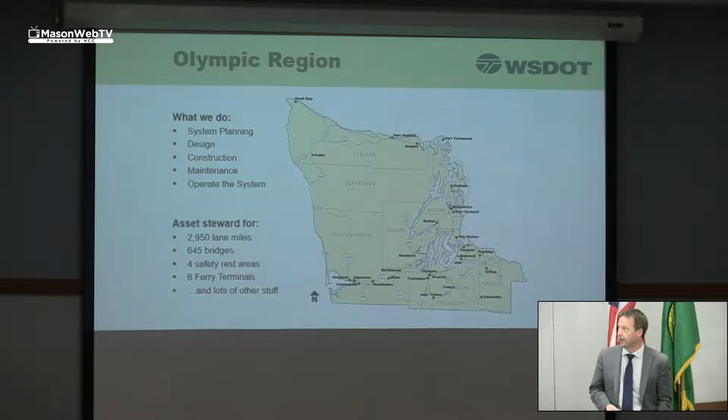I wanted to start off with just orienting y'all to Olympic Region. The state of Washington is divided up into 6 geographical areas for WSDOT, and Olympic Region is one of those. We are, as you can see there, a 7-county area. And the 6 regions around the state, our mission is to deliver products and services for our customers, which includes all of you. And as you can see, we do that by planning, designing, operating, maintaining the system.

And the system is a lot of stuff. I just put a few bullets up there. We own a lot of stuff, a lot of lane miles, a lot of bridges. And our job is to run that effectively, and we don't do that ourselves. We do that with the help of industry, with the help of all of our partners, the 48 cities in the Olympic region, the 171 unincorporated areas, the 13 tribes, and a whole host of inquiring minds that are interested in transportation. Just about everything runs on the transportation system.

So before I go into construction this year, I wanted to talk a little bit about winter operations. This was a particularly tough year for us at WSDOT. I'll use a technical term, we got slammed. We have 49 state routes here in Olympic Region, and at various times, starting in mid-November until early March, we had over 140 water over the roadway incidents on 28 of those highways. We had 111 tree down incidents. Similar to this one on 101, which, if you all recall, 101 was closed north of here for over a week, I believe.

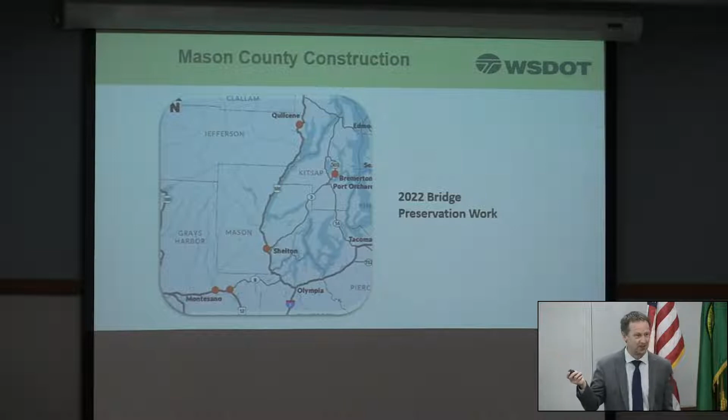This work, we've let the contract, and the contractor doing all these sites told us they might like to come to Shelton in mid-June, so it's coming pretty fast. So anyway, stay tuned for more.

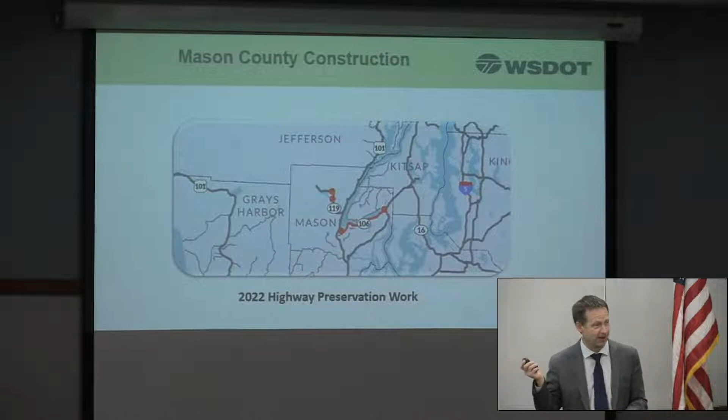Turning to highway preservation, we have 2 projects. It's actually 1 project, but it's 2 different locations. We'll be chip sealing, BST work on 106, the entire length of 106 from 101 out to Belfair, and then a 4-mile section up on Lake Cushman Road on 119. Recognize these are popular recreational routes, and chip seals are not our favorite either. We end up not just paying for the work, we pay for windshields later. I encourage you to just slow down, patience.

And why do we do chip seals? Ideally, we like to pave, but on our routes with lower traffic, and frankly with lower truck traffic, since trucks are what damage roadways, BSTs are an economical solution. We can't afford to pave and overlay highways everywhere anymore. So we use chip seals really to keep the water out. Water is what damages highways, plus the hit from the heavy vehicles. We get about 7 to 8 years out of a chip seal. We get about 12 to 15 plus, depending on traffic, out of an overlay. So we can get 2 chip seals, and it's about 4 times less in terms of money for a chip seal.

It's probably alternating one-way traffic, so they'll push traffic on one side of the road while they work on this pier and then swap traffic over. So this is going to be a little bit of a hit as you're going out of town. Not a DOT project, so don't call me if you want to complain.

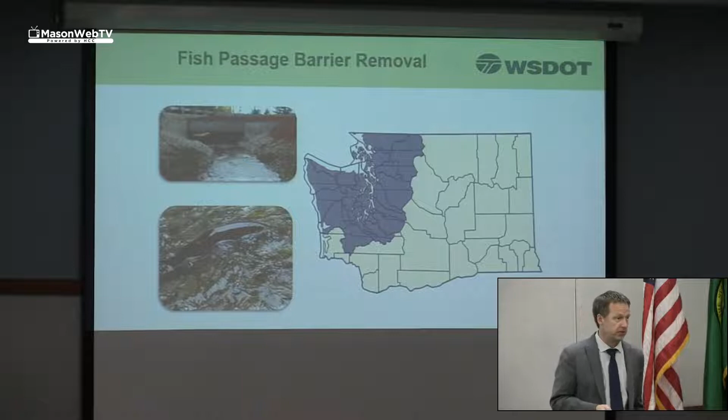We have a lot of those here in Mason County, the whole region. We have roughly half of the fish barriers in the state right here in the Olympic region. So this is not this year, this will be next year. We have let this contract. It is a design build contract, and every one of those dots is a fish barrier. So it's primarily on Highway 108, and there's one, Griggs, down on 101. It's going to be high impact. This is design build, so I can't tell you exactly what it's going to look like, but typically we do what we call a shoofly.

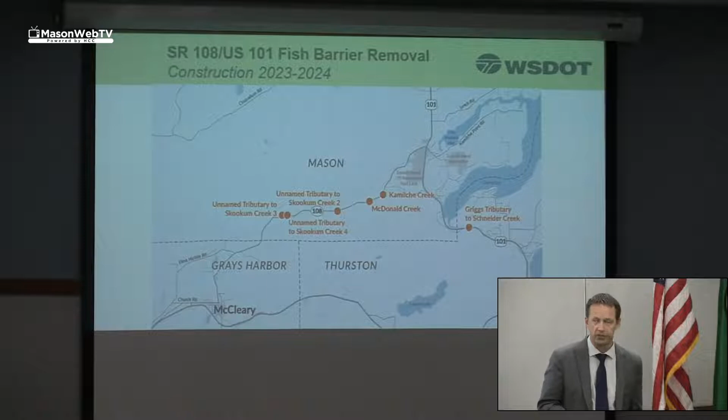We'll maintain the lanes, and we'll take traffic off the side while we replace the culvert with a bridge. We are talking about some high impact, short duration closures on 108. So we may detour traffic around 108 to get in and get out as fast as we can. So more to come on that.

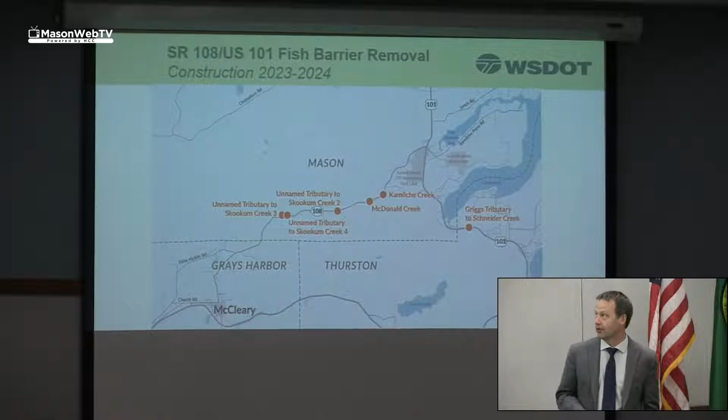And our commitment is you understand what we're doing, why we're doing it, what it's going to look like while we're doing it. So we'll have good communication and community outreach as we move this forward. Again, this will go summer of '23.

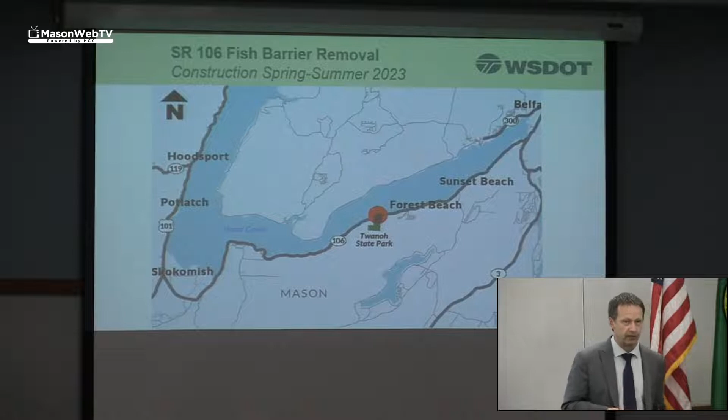And then Twanoh State Park. There is a fish barrier right at the park that we've been working really hard with the park on and others. Would have been nice to do it when we do the chip seal this year, but it's not working out that way. So next year, we will impact everybody twice. We are also looking at a closure here, a 20-day closure of Highway 106 with a detour. So that is what's being explored right now as the traffic control strategy. Anyway, this will go also summer of '23.

However, that $12 million we got from the legislature this year, we thought the intent of that money was for cost escalation. Cost of construction materials are going up just like everything else. But we've also heard anecdotally that a connection at Romance Hill and a connection at Log Yard Road is the intent for that money. And if that's the case, we will not be going to construction in 2024. It will be probably 2026 because we will have to go back and renew our environmental document. Our NEPA document for this project did not assume any connections, so we'll have to go back out and redo all of that. So we're working through that. I don't have an answer for you today, but construction's coming relatively soon. I can leave you with that.

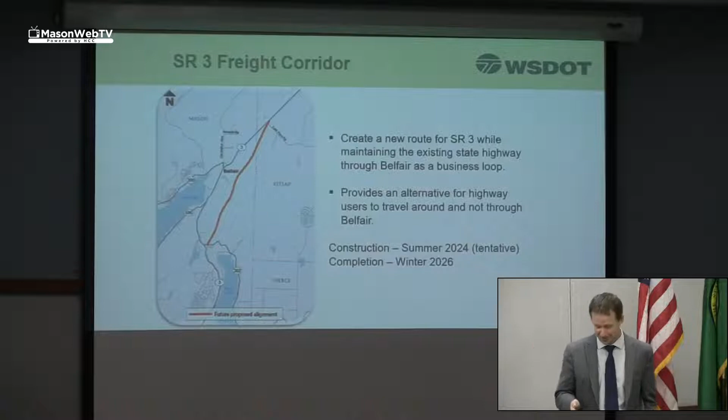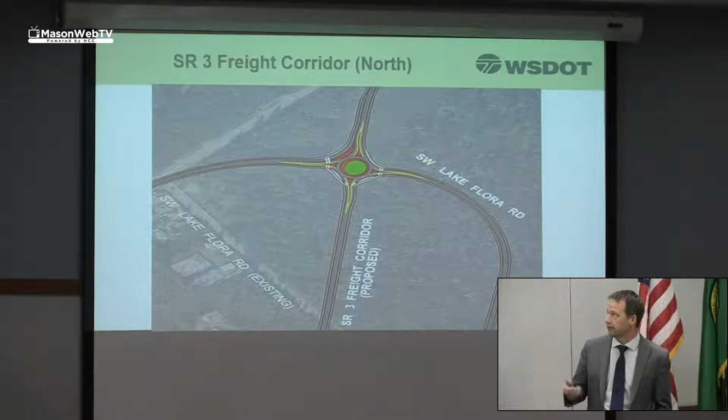And then at the north end, this is the Lake Flora Road connection. It's not going to be a T intersection anymore. We're bringing everything over to, I guess that would be the south, and this would be your way into Belfair today, and then this is the way to take the bypass. So roundabout constructions on both ends of the corridor.

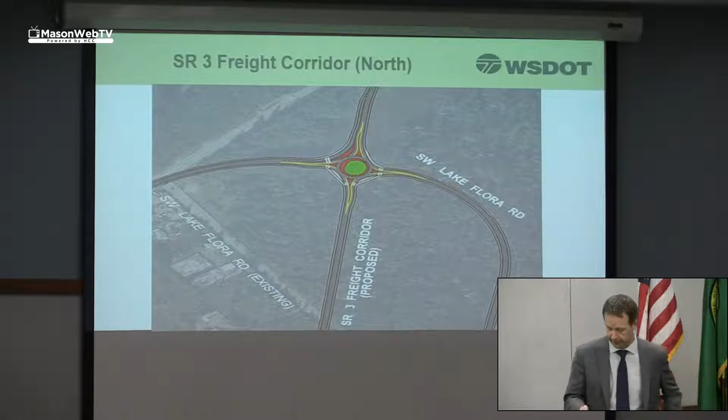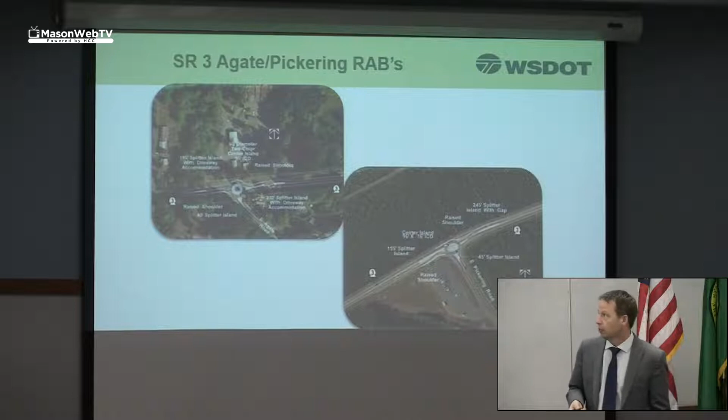And then I thought I would mention just out of town here, Agate and Pickering. You may have seen our online open house pre-design work on these. We're proposing roundabouts at both intersections for safety reasons. Roundabouts are incredibly good ways to reduce the severity of accidents, as opposed to a signal. So these will likely get built in 2024.

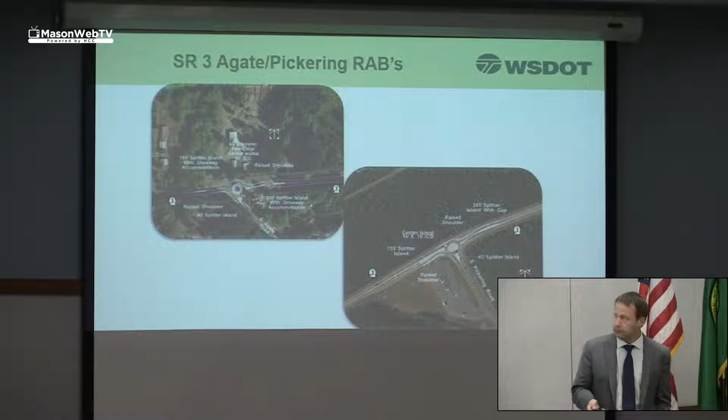And that's what I have here. That is the sum total of all the fun WSDOT projects in Mason County. I'd be happy to answer any questions.

Yes. Me? Yes. Okay. So is the Belfair project going to go on in the next year or so, or not? I was a little confused. The freight corridor? The bypass, they call it around here. Yeah, what's called the bypass. That's what I'm used to calling it too. We're designing it. We plan to go to construction in 2024.

Oh. We will not go to construction in 2024 if we have to add connections. Right now it's a limited access facility. There aren't connections, except at either end. If we have to add a connection at Romance Hill or Log Yard Road, we have to go back and reevaluate our environmental document, which will take 18 months. Okay, thank you.

Any other questions?

Okay, I'll leave you with one more that I forgot to mention. In the Move Ahead Washington package, the new transportation package, there's also 35 million for phase 2 of the Belfair widening. So we widened, sidewalks, two-way left turn lane in the middle. I think that stops just south of the school right now.

We have $35 million to continue that down to the intersection with 106. The catch is, we don't know yet when we're authorized to spend that money. It's just not spelled out yet. So that's one other item that's coming to the community.

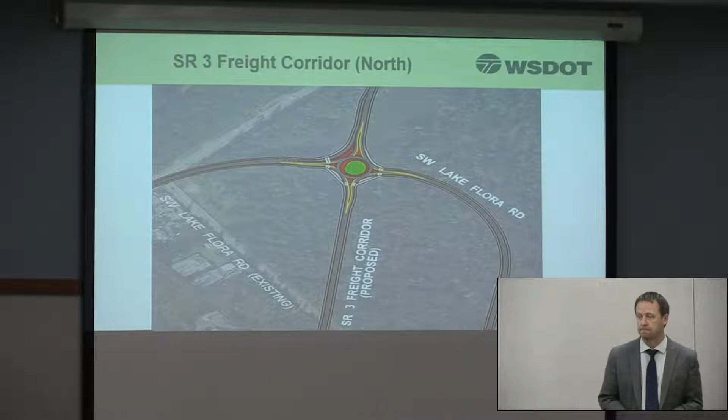I'm confused on the fish barriers, the bridge versus the culvert. Why don't the fish like culverts? That's a fine question. Typically, it's a couple of things. If you look at a lot of our culverts, there's a hydraulic jump. The culvert literally spills down and the fish have to jump up to get through it. It's also the velocity. A lot of our culverts are on pretty steep grades.

I don't know the science behind it. I'm not a biologist, but it's velocity, it's the gradient, it's all that. There's a term called stream simulation that we use and the biologists use to design these things. It really gets at being able to get upstream. We've opened hundreds of miles of habitat here in the region already with what we've done. And we do see the fish upstream where they weren't before, so we are seeing results. That's great.

What about dams? I hear about the ladders they construct next to them. Is that helpful with the fish going upstream? I don't know. Okay.

A number of years ago, I was a county commissioner, and I had a project at Lynch Road and 101. And we were trying to create a partnership with the tribe and the county and the state. So is this project ever going to happen? Lynch Road?

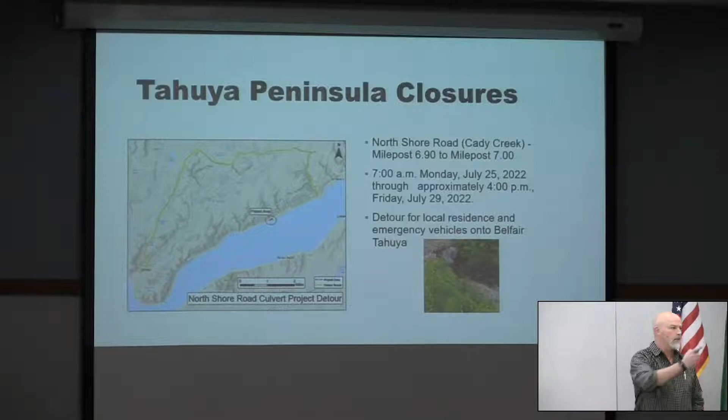The next closure will be down here on the North Shore, Cady Creek, milepost 6.9. That'll be closed from July 25th to 29th. We're replacing an existing 3-foot diameter culvert and putting one in that's 18 feet wide. There's a good question back there. Fish barrier culvert.

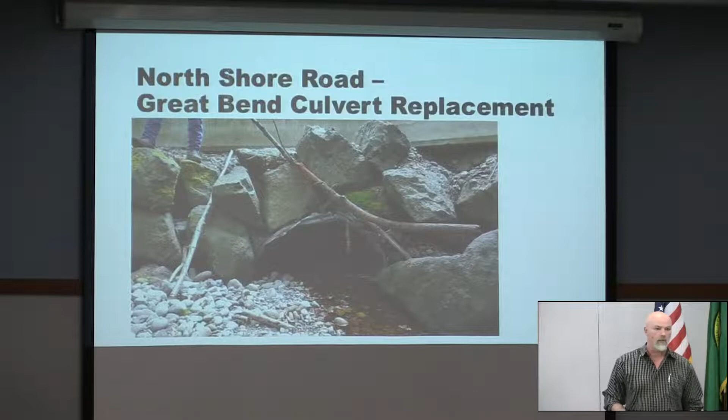Agate Loop. Agate Loop is going to be closed for probably a month or close to that. We got a contractor to replace this culvert. Redside is the contractor. He's wanting to get in there sooner rather than later. But in any case, it's another one. It's an 18-foot box culvert. So,

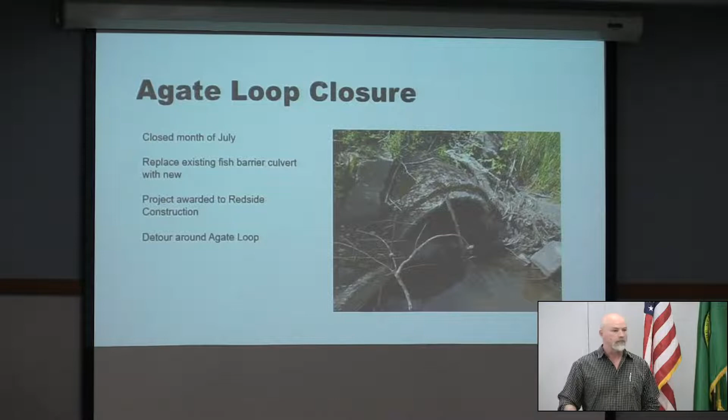Harstine Island Bridge. Harstine Island Bridge is a $3 million project. We're going to scarify the existing surface and do a polyester polymer application on that. We've got a lot of exposed rebar and spalling areas and stuff, so we'll actually be redoing the deck. It's going to be one-lane traffic, so there'll always be some passage, but it's kind of hard to get off the island without it.

Maintenance activities. Our chip seal program for this year, we're going to be up in the Twanoh Falls area, Belfair, Tahuya, a couple places out of Shelton, Matlock, Brockdale, doing a little bit for the Skokomish tribe, so we're going to be all over. Unfortunately, the best time to chip seal is when there's the most traffic in the summer, so bear with us.

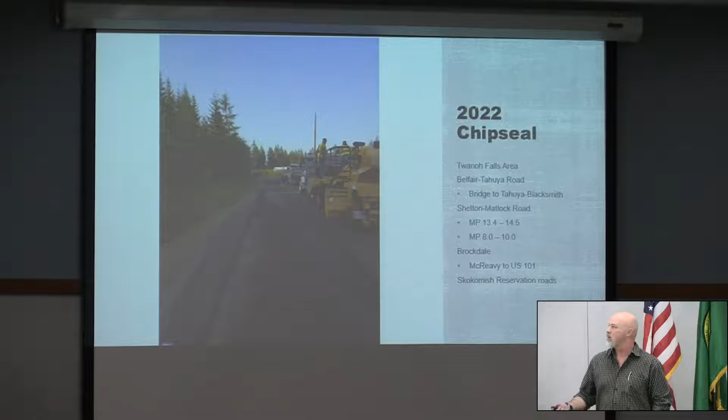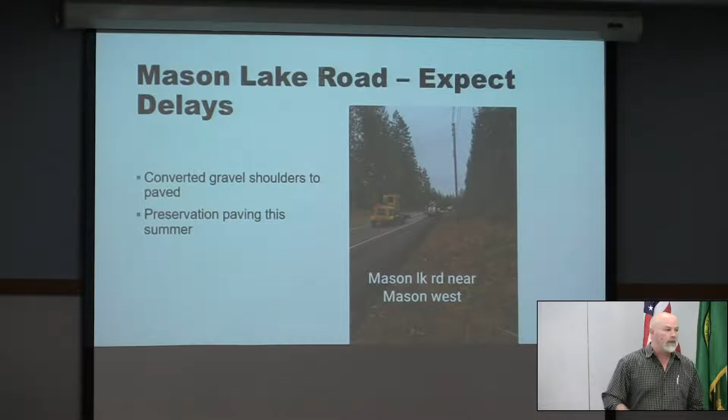I don't know if you've noticed around here in Brockdale, Mason Lake, McEwen Prairie, we've been actually paving our gravel shoulders and converting them to a hard surface for errant vehicles, bicycles, pedestrians, and such. So we're working here on an STP funded project this year up on Mason Lake Road. It's been really improving a lot of the shoulders around, so they've turned out really good. And that is the short list.

Anyone have any questions for Mike? Yeah. When do you plan on doing that chip seal for Sunnyside? Sunnyside chip seal will probably be in the latter part of the summer, so probably in the September area. We're going to try to get our big roads done first, and then the gravel roads. What you have to do is prep them and then shoot them right away before they get torn up again by traffic. So it'll be in September probably.

It almost seems near some of the slide areas too. It seems very close to them. Yes, absolutely. We're actually requesting some FEMA funding for some of those slide areas along the North Shore. We've actually been doing quite a bit of work along the North Shore, if you haven't noticed, with drainages and stuff. We've been preparing those areas so that they don't get out of hand again.

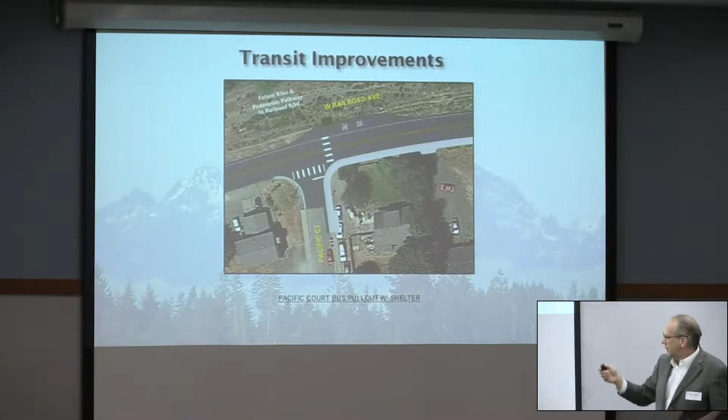So the transit improvements I spoke of, Pacific Court, we're going to actually put in a turnout there and the bus shelter. Stormwater improvements, we're going to take the water, treat it, and then infiltrate it. And then there will be some overflows that continue to Goldsborough Creek, but those are during the really high, large storm events. So significant improvements because the water is running directly to Goldsborough Creek right now, which is obviously a fish-bearing stream.

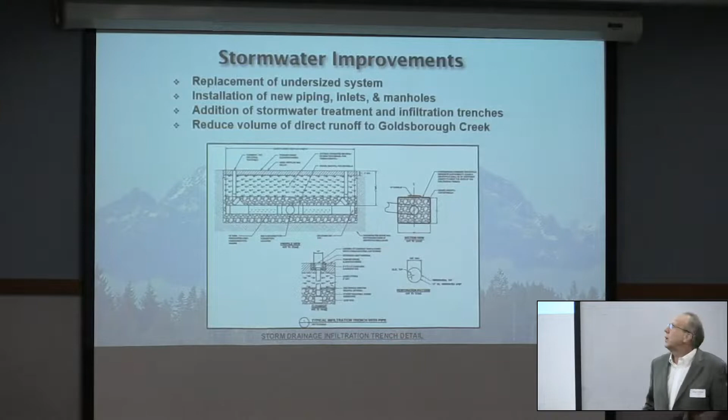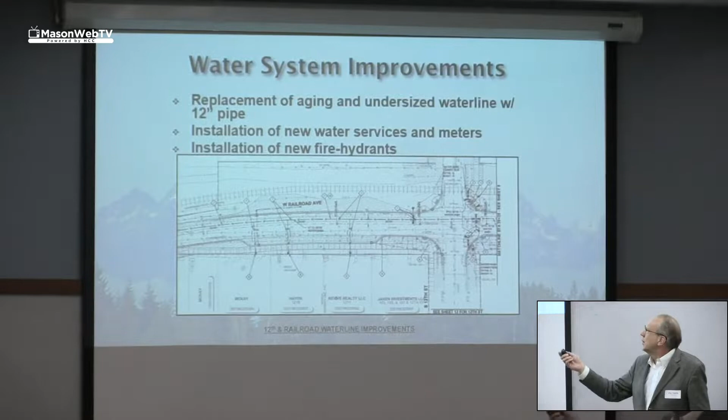Water system improvements, the water line is undersized, a bunch of different material types. We're going to replace it with 12-inch ductile iron pipe. The project is held up right now just because of ordering the pipe and parts. You know, valves can hold up your project, right? If you don't have the valves, but you have the pipe and everything else. So I'll talk more about the construction timeline in a moment. All new fire hydrants, and we're putting in a few extra to fill in some gaps that existed.

So the Safe Routes to School project, it will have flashing beacons to get people across Railroad Avenue over to Evergreen Elementary. And we do have 2 other locations in the city. One's up at the high school, and the other one was, so we're doing 9th and Railroad and high school, and what was the last one, Jeff? Come on, Jeff. Come on. Oh, I know where it was, right by Safeway. Yes. We're right in the same area, right down by Safeway. That is highly used right there. Buses are coming in and out and all that.

So it's been our #1 project on our 6-year transportation improvement plan. We did get money from the state, from Transportation Improvement Board. Some for the sidewalks, some for the roadway overlay. That was 2019 though. You fast forward to today, because of inflation, we have some issues with costs and funding and that sort of thing. We got those resolved. So the low bidder was Miles Construction.

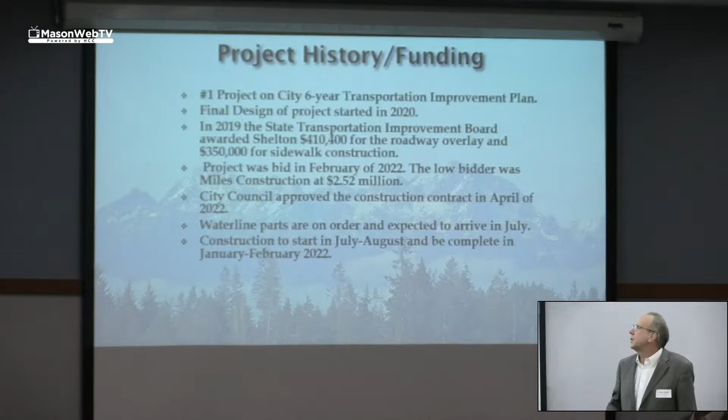That's Miles Sand and Gravel, right? They're right on the project for the most part, which is really good. They've got a local company that's going to be able to use their quarry right there as a laydown yard. Council's approved the contract. Waterline parts are on order. We hope to start in July, probably latest in August, is what we're anticipating, but we're still waiting on those waterline parts. And then we're thinking the construction will be mostly completed later this fall. They'll be wrapping things up during the winter. And they said Valentine's Day is their end date next year, okay?

In terms of roadway closures for the project, we're anticipating using Franklin Street as a one-way and have a one-lane closure on the roadway so we can keep both ways going at the same time. The water line in some instances is right in the middle of the road though, and that's really a problem. So we might have some nighttime closures and that sort of thing where there's just not enough working room to get all the men and equipment in there. So the water line is going to be the big holdup on the project of really closing the road down.

We do a good job though. You'll see our flasher boards out there a week ahead of time saying the road's going to be closed from this time to that time. That sort of thing, so people will know more about it and not drive up on it that day, right?

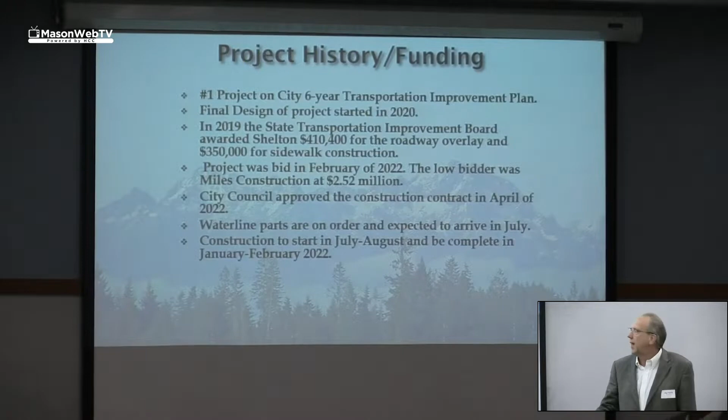You guys are being easy on me.

There you go. Do you think you'll ever put like a roundabout where the four-way stop is on Rockdale? Yes, there's plans for that in the future. Roundabouts are expensive, $2.5 million, and that is from a few years ago. I'm anticipating that price went up. And so the city does want to try to get into more roundabouts and less signals. They're safer, especially for the pedestrians. We have higher pedestrian traffic.

It's safer in roundabouts. Then also cars, if you do get a few wrecks, you don't get the rear end and that sort of thing. You get these really low volume because people aren't traveling as fast. But they do need to be designed for trucks, right? And make them accommodating to all the design vehicles, right? So it's in our plans, but we do need to find final design funding for that and construction dollars.